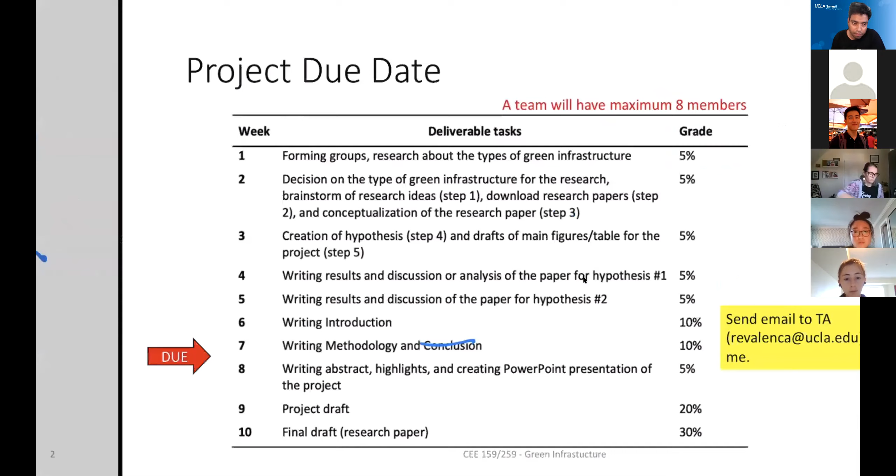That's just the Excel file—the problem will be given. You'll change different variables and you will see how that changes. So we'll solve it in class and not share the Excel file until you try it, because once I share the Excel file, you'll just change the number and get the answer. So I want you guys to try it just like we do in class.

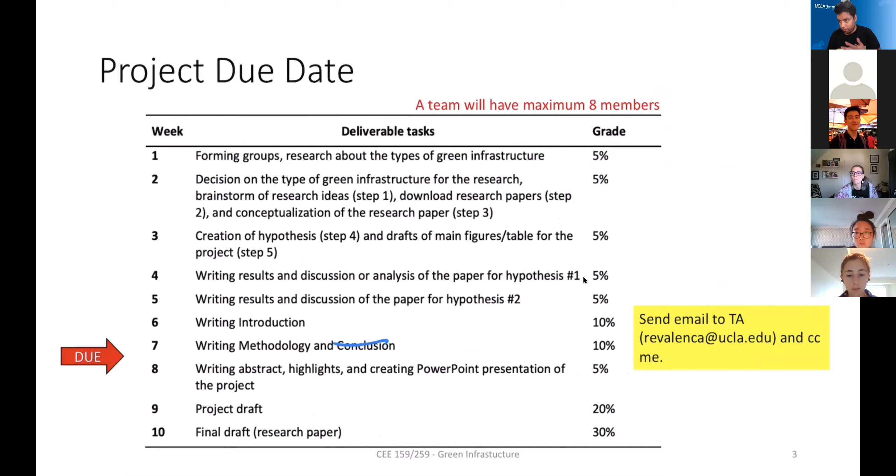Okay, so that's all for what the rest of the quarter will look like.

Mostly we'll learn different types of green infrastructure and how they're designed, but it's mostly project-based. Today we're going to learn about green roofs. Last class, we learned about permeable pavements. The idea of permeable pavements is that it doesn't require any more space than you already planned, because you always have pavements. Green roof is the same case. You will always have a roof, and if you have a roof, that means you have space. So you're going to use existing infrastructure to design green infrastructure.

But the challenge is, why not have green roofs everywhere? Every building has a roof, so why not make it green? Well, there are some constraints, and that's what you'll learn in this class. First, not every roof can be translated to a green roof, because a green roof means extra weight, and the structure has to support that extra weight. That's the first constraint. The second constraint is cost, because it's not cheap.

Anytime you change something, you're not really using it more - you're just changing the roof structure. You're not creating a space for yourself to add another room or something that gives you value. So a lot of times green roof has almost no return unless you're using it for some purpose.

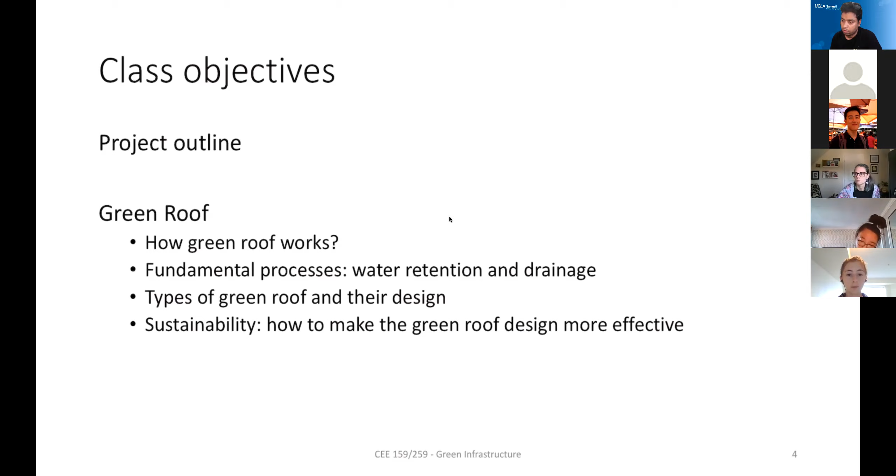Because you're not really treating stormwater using green roof, mostly in this case, in Los Angeles or a dry climate, it's mostly about energy saving. But if you're from New York, your focus isn't about energy - well, it does have some energy benefit in winter, but that's not the only reason. You can actually benefit by retaining some stormwater and lowering that peak flow, so that you won't have combined sewer overflow. So it's mostly water quality, water quantity, or energy benefit.

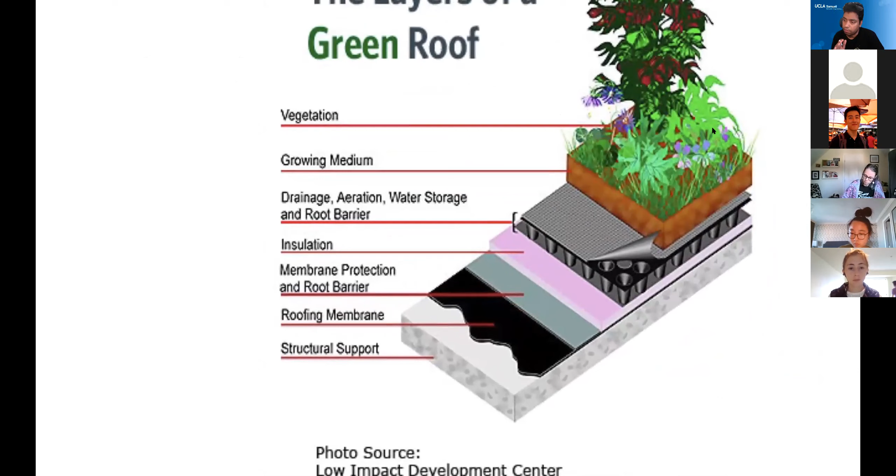So let's look at all those different aspects of it. You have different layers, so let's start thinking about what each layer does. Let's start from the bottom to the top, because that's how the green roof is designed. So you have a roof. This is the roof. This is all roof.

The first thing you want to do is add a structural support. Structural support is needed because you want to put a green roof on, but you don't want to put it directly on your roof because it will damage your roof. So you have to put some kind of in-between layer, so that not only does it hold the green roof above, but it also protects your actual roof, because once it's damaged, it's very expensive to rebuild any roof. So that's the reason for structural support. It protects the roof from physical damage. And it also gives you a basic, uniform surface for things to install on top.

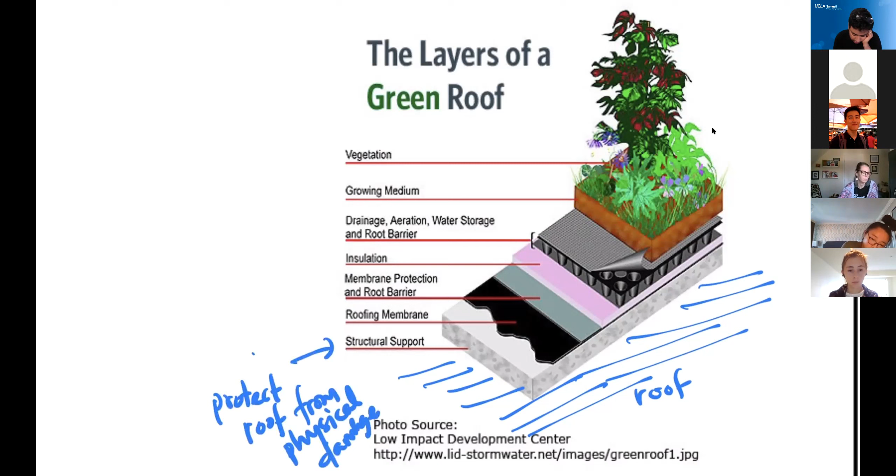Okay, so let's think of the next one. Then you have a roofing membrane. Anybody guess why the roofing membrane is there? If you don't have that one, what will happen? Could water reach the structural support?

Exactly. The structural support is something you don't want water to get into, because once the water gets in there, it will stay there, and it will damage it. Biofilm will form, the cement will crack, all those things will happen. So you don't want the water to stay there all the time, and also the roots, you don't want them to go in there. So this is mostly to prevent water from damaging the roof.

Okay. So that's for the second one. The third one, membrane protection and root barrier. So that's the next, the green one that you see over here. That already says what that means, because the black one that you see is basically a high density plastic. It's nothing else.

That's called geomembrane. That's what is used below the landfill, the same thing used below any kind of materials. That's the reason for plastic, because plastic doesn't degrade within, let's say, 25 or 30 years. Normally, this plastic will not degrade for 100 years. So that's why you put this high density polyethylene or HDPE, very high density, strong plastic there.

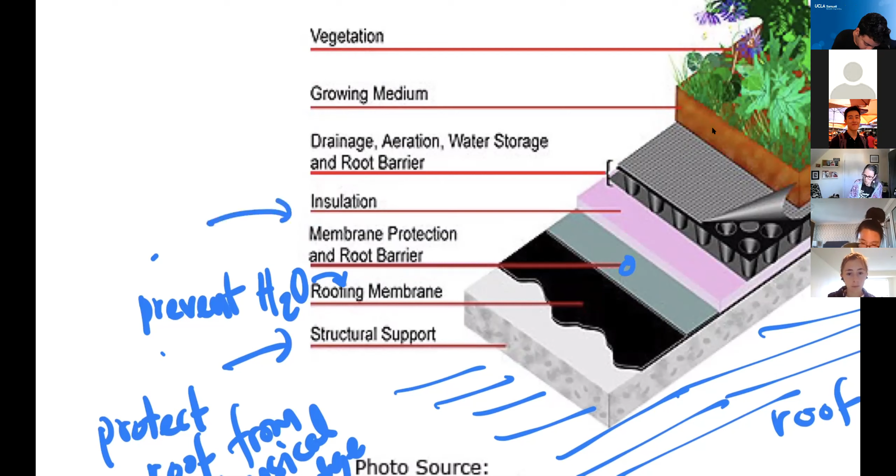Then on top of that, you have an insulation system. Insulation system is needed if you want to use green roof for energy saving. So insulation is mostly for heat. It's not for water. Water can pass through it. So this is for heat or air conditioning.

Okay. So what you are doing is putting these different types of mat. That's all you are doing so far. So the next thing is, let's see what's going on here.

Okay, there's some disconnection, so now you should be able to see my screen.

So the next step is basically a drainage system, where any water that comes in from the roof, you want to collect and drain it out. So that's why you need some kind of drainage network. And that's what it is there. The next one, what you see over here, is basically plastic grid. You just spread it, or you can apply gravel, right? That's what you do in biofilters or any other system.

But think of it this way: anything you apply here on the roof, lightweight is an important factor. You don't want heavy weight. That's the reason you are not putting gravel here. All you are putting is a plastic which has a porous structure that will just drain water. So basically, it's just for drainage, and it has to be lightweight

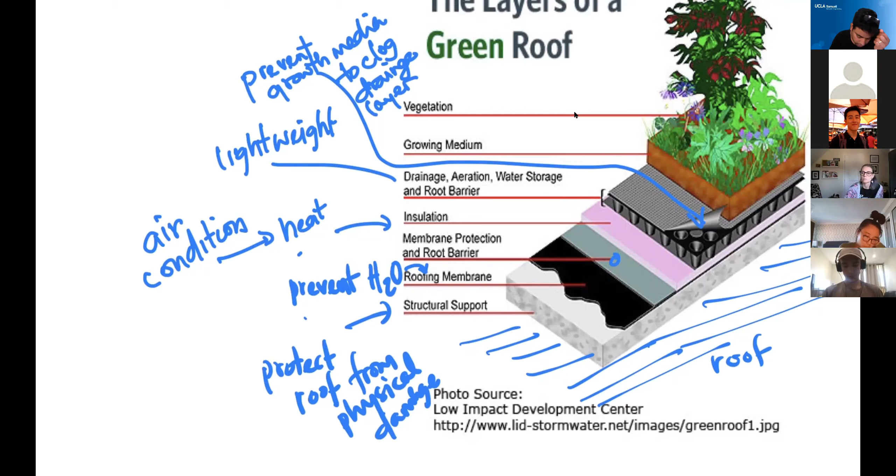And so particle size, so growth medium, the only way you can control growth medium, you will control the depth. So first is depth. So that is one thing. So you wanted to increase the depth. So let's say this is high. If you are living in Los Angeles, that's where you put the growth medium much higher. The reason is it retains so much water, or the root structure will get a lot of water from deeper soil, so that you don't have to continue to irrigate.

So depth is high if you have dry conditions, but depth is low if it is wet conditions. The reason is you don't need irrigation. You just let the water come quickly, just filter out and leave the system as quickly as possible. So irrigation is not a factor. And then second is particle size or grain size.

If you use too much sand, obviously the soil is too heavy. Number one, sand is heavier because it is not porous, and it also doesn't retain much water. So you want to add a mixture of like mulch. Think of it, you add a lot of mulch there, it will just soak a lot of water, and so that's what you want. Okay.

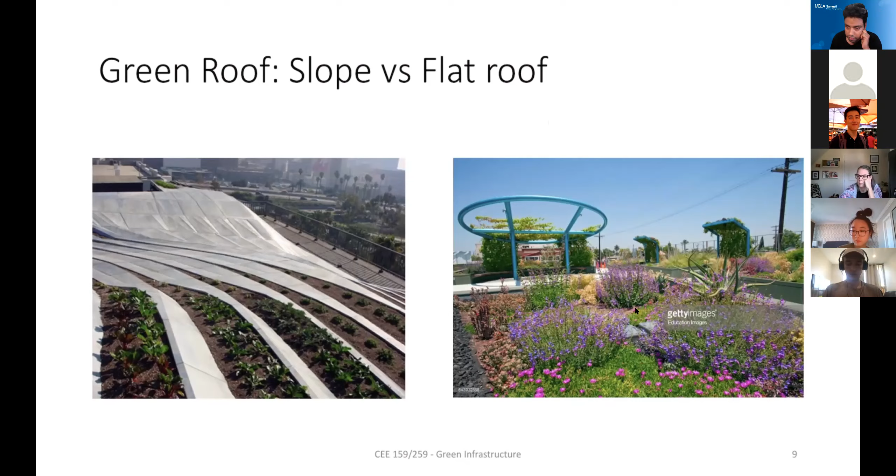When the roof is a high slope, it's very difficult to design anything there. So what you do is you create different layers. So that's what happens here. The other one is just a flat surface. And I think this is the Getty Museum. This is a Holocaust museum too on the right side. So where people are walking is actually green roof. Everything below is the museum.

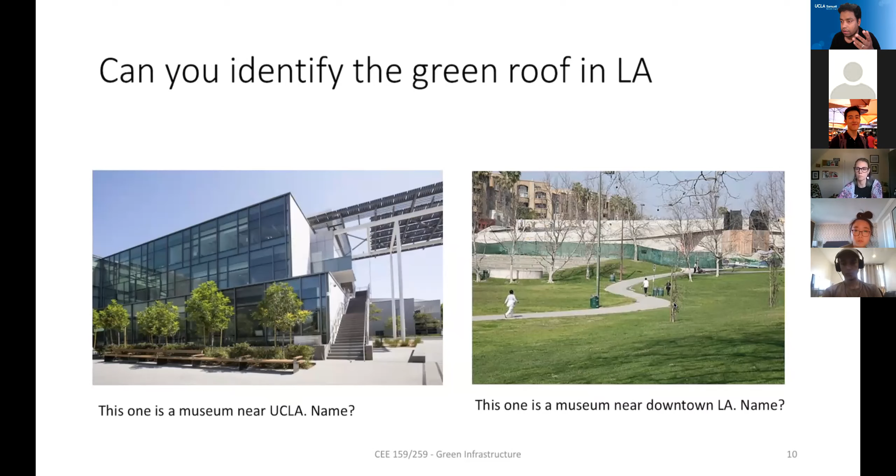And you can see at UCLA, the football stadium is basically a roof. Below it is a parking lot, right? So you can create this kind of structure anywhere. So the fundamental process, I explained it. A couple of things we just want to revisit that you already learned. This is a supplying concept here. The first is the plant health. It's a green roof, it has to look green, right?

So how to improve plant health, that's based on the moisture, nothing else. You add the compost, all that stuff, so that it has enough nutrients, so that's already there. But it's just how much water it needs, because naturally there is no groundwater here. Everything is irrigated or rainfall. So water storage is important. That's why you have this drainage system, aeration system that you can continue to use and irrigate.

Very few times people actually use a green roof for rainwater harvesting, because believe it or not, green roofs actually contaminate more water than they save. The reason is you add this growth medium which has lots of nutrients. So most of the stormwater that comes from a green roof has lots of nutrients. So if you have an area where nutrients are a problem, a green roof may not solve it. To solve it, you have to apply slow release fertilizers where the nutrients will stay there, not washed off. Okay, so that's one aspect of it.

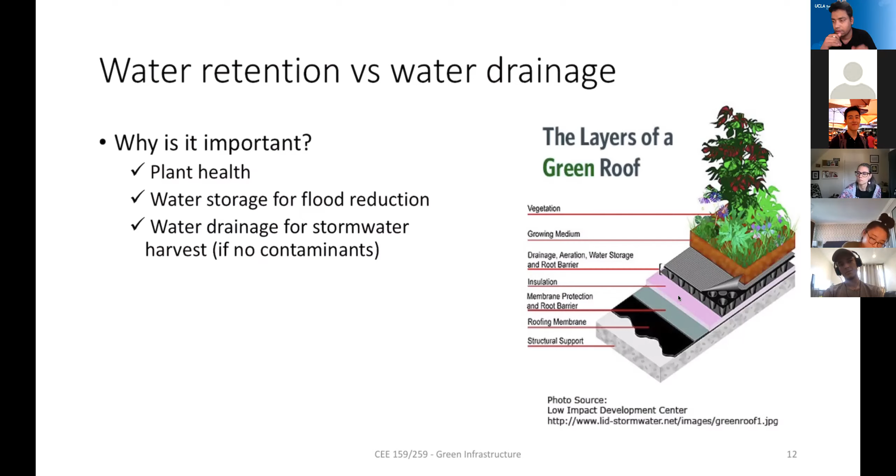And second, many green roofs have heavy metal pollution. The reason is the rooftop, all the other aspects. Sometimes there are metals on the roof. You want to protect those. You don't want to have a green roof on metallic structures. Okay, that's something to think about.

And the number one control is hydraulic conductivity. You already know how to use that using Darcy's law. The only thing I want to suggest is the K. That's the controlling factor. And what controls the K is basically your particle size. So I'm just going to write this. You know that.

So you want to drain it, but at the same time you want to also retain. So it's usually a mixture of large grain particles and, like, mulch, small particles. A combination of those in a mixture will be useful. So these are things, again, I didn't write those.

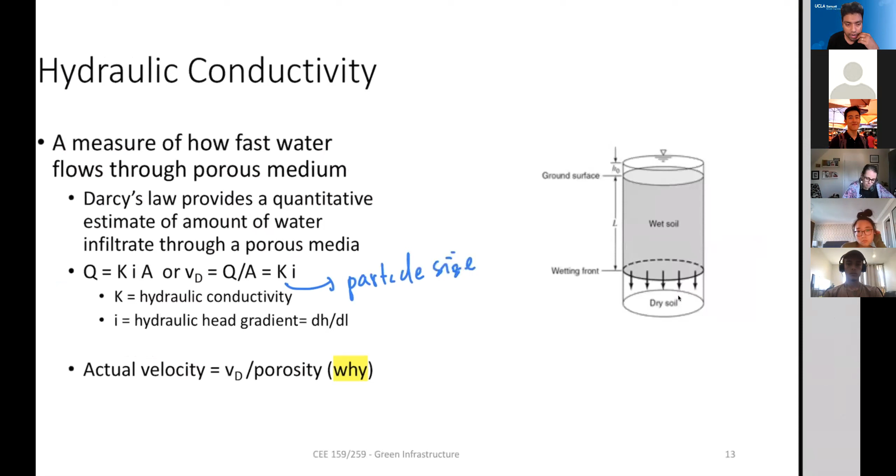Why porosity is important is basically the porous structure. That's where water moves, right? So the first thing is drainage. You've got to drain so that if there's heavy rain, it doesn't flood the entire roof. You don't want things to retain too long. And the second one is water retention.

So for water retention, if you increase the particle size, the opposite thing will happen. In hydraulic conductivity, if the particle size increases, your K increases. Hydraulic conductivity increases, but your water retention, or theta, decreases. Water content, also retention. But if your particle size decreases, your K decreases, but your theta increases. So this is, let's say, clay at the opposite end, and this is, let's say, gravel.

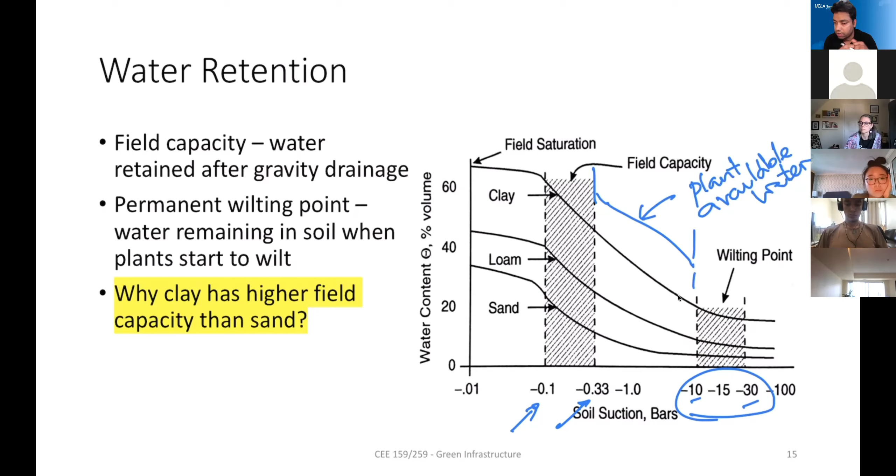Every time you create a soil media mixture, people measure for field capacity as well as wilting point. If you apply that pressure, -10 to -30, you will see how much water is drained. That will tell you whether this is a good medium or not.

What that means is if you apply compaction, the maximum amount of water that can be retained during gravity drainage is going to decrease because there is less pore space. You are compacting, there is not enough pore space to hold that water. So your soil will not retain that much water for your plant. That's why compaction is not recommended for green roofs. And why do people even compact? They don't compact by default, they accidentally compact by walking on it.

So a lot of times in green roofs you'll see there is a designated walk path where people walk, and there are spaces where the plants are. They will write there, don't step on it. Sometimes they put big rocks so that you can step on those rocks and walk to access different locations, so that you don't uniformly compact everything. So that's the design. When you walk on a green roof, this is the reason, the science behind it.

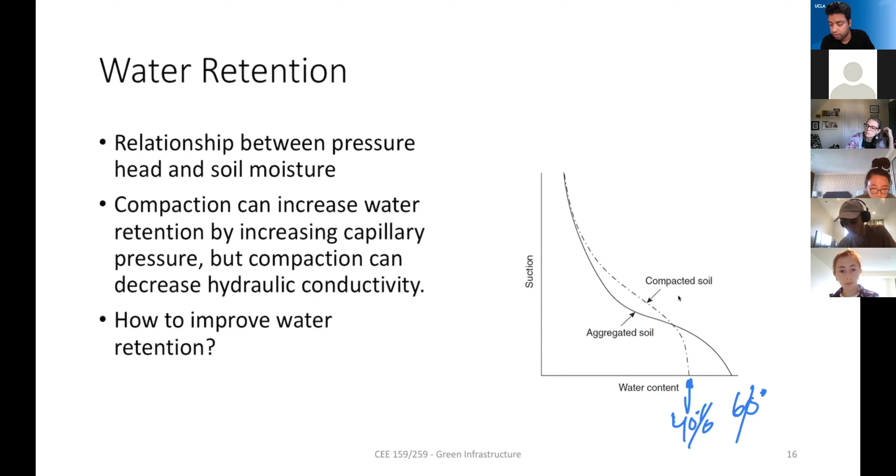Let's think conceptually. First, K. If K increases, TP increases. What is K? K is hydraulic conductivity. So if you have a high hydraulic conductivity filter media, all it means is that things drain so quickly that it is not ponding. So that makes sense. If you have a highly conducting medium, you'll not pond.

The next one is delta theta. It means how much moisture is already filled in those pores in the filter media or the green roof media. So if it rained just recently and everything is already irrigated, that means it takes less rainfall to become ponded. So that's the difference in moisture content, or how much pore space is filled with water.

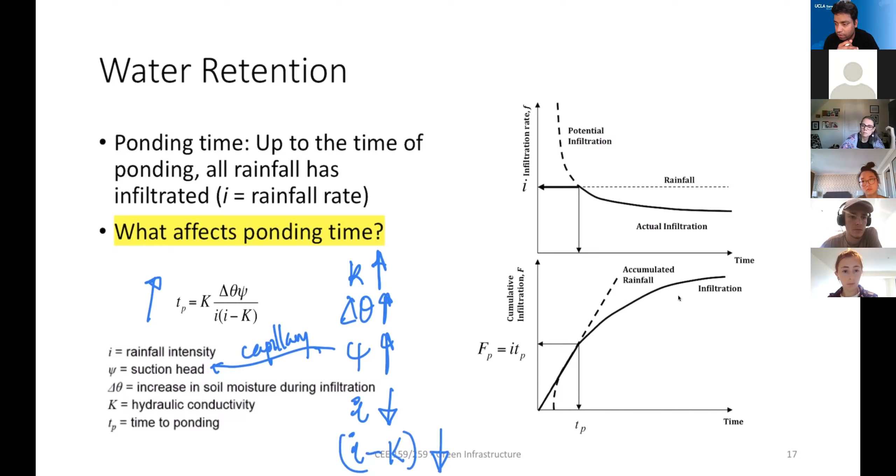So now we are going to discuss the design. I'll just give you a specific number. As I said, the components are: number one is the weight, because many structures cannot survive that extra load.

That's one of the reasons many buildings in Los Angeles will not have a green roof, partly because structurally they are not strong enough to hold a green roof.

And second, obviously, the cost of energy. You'll spend so much money here, you have to irrigate them to maintain it. It costs you to maintain them because of irrigation. The only way you can get some money back is through the money you save on energy.

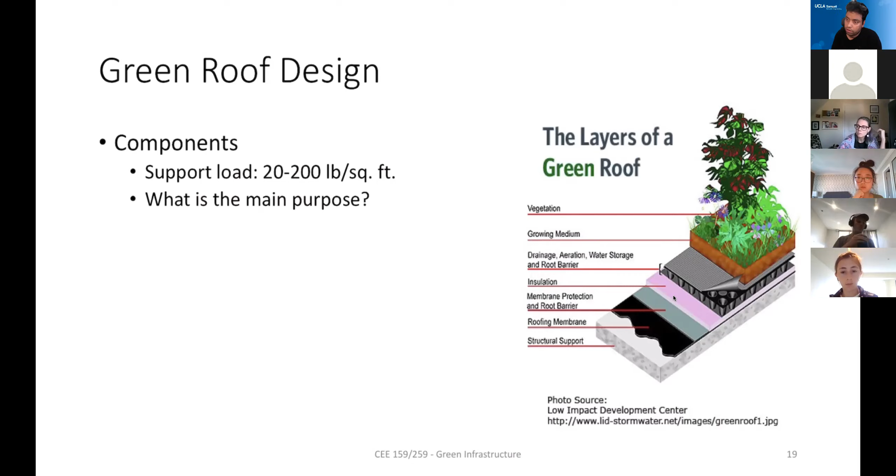There are different design permits for how it is done in Los Angeles. This is written here. All I want to say is that you have to consult with LA County to see whether you have to do an intensive or extensive roof.

Intensive versus extensive is all about the size of the filter media or the growth media. And then Los Angeles County will also tell you if the structure can support that green roof.

The fire department also checks, because if the green roof isn't properly maintained, it's a fire hazard - any kind of plant on the roof is going to catch fire. That's why the fire department comes in here. Then they do the assessment, and you'll have those teams.

So this is the difference, okay - extensive or intensive, all that. As I said, you have different types. The difference between the left based on the depth, okay.

This is for a dry place, this is for a wet climate, or dry climate. Again, the reason is the roof will have more water accessibility so that you don't have to irrigate. The second one is about drainage type.

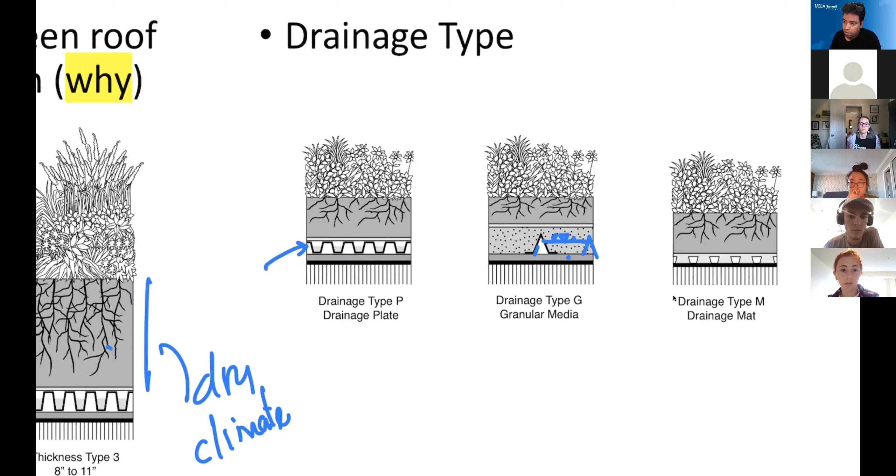If you don't have a wedge, this will just drain uniformly. So it creates this pothole-like block to keep it. There are different types of mats, different sizes - it doesn't really matter, it's based on the location and what kind of media you use. Right now, it's more common to just use a plastic tarp.

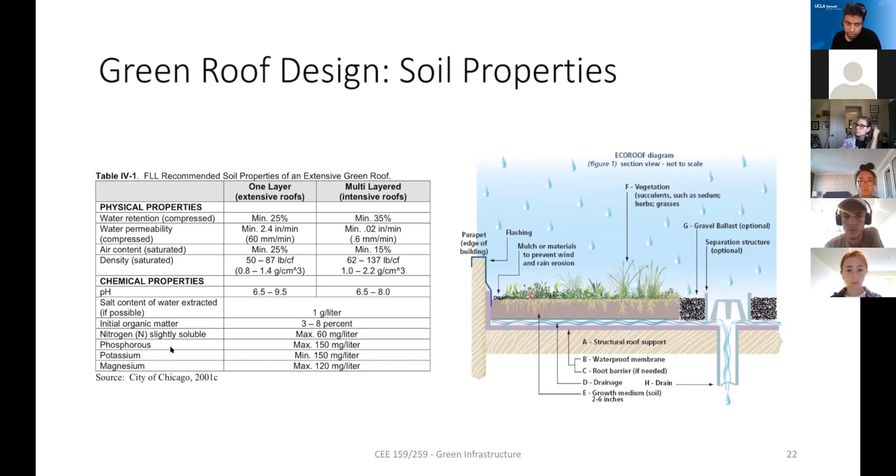And soil properties, as I said, have to retain enough water for the plants, yet be highly conducting so that it drains the water as soon as possible. So this is the other factors given - you can see there are some nutrients you have to add because you don't apply fertilizer all the time, so that's why some nutrients are added, and there are other factors as well.

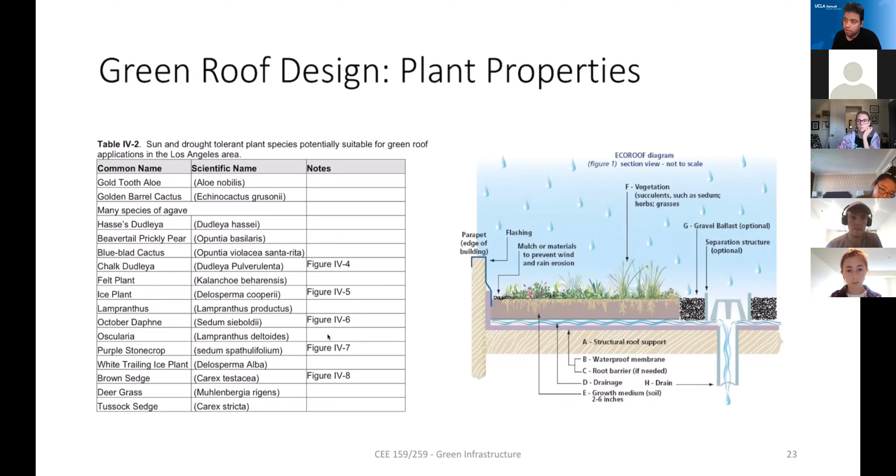Plant properties: most of the time people use whatever they want, but normally it's better to use drought tolerant plants in Los Angeles because you don't want things to be irrigated a lot. A drought tolerant plant may or may not be invasive, but since you're maintaining within one boundary zone, invasive is okay because there's very low chance for them to distribute, though who knows if their seed will go somewhere else. People mostly plant for aesthetic purposes, they don't really put native plants, but as long as it's drought tolerant, that's important.

Planting method: as I said, there are different ways you can put the vegetation, whether you put it as a small box, as you see over here, this is the media. You can see there are gravel things to collect water, or just walk above it. All those places are there so that you have pathways.

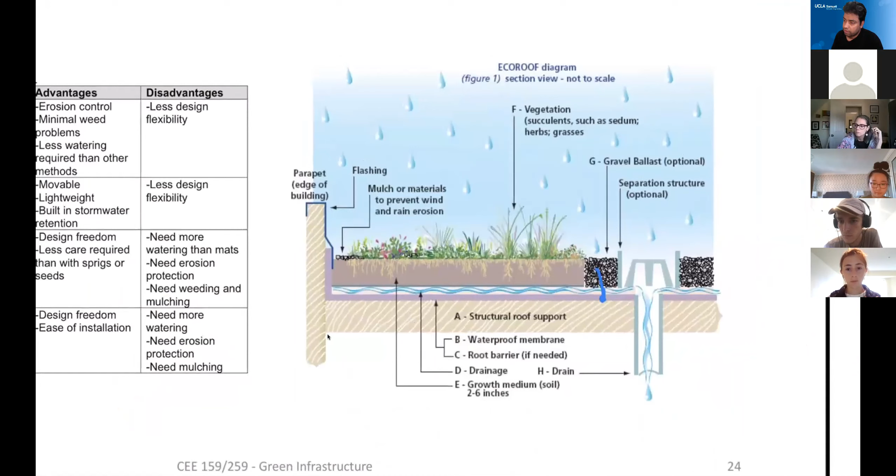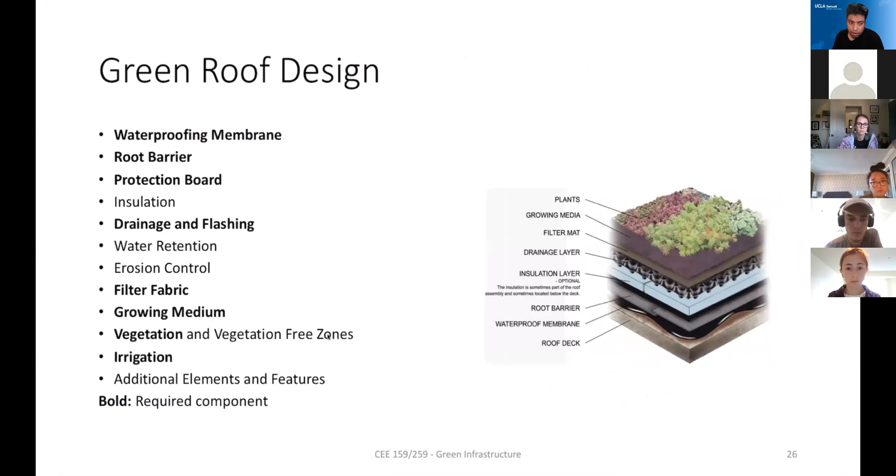Designing the green roof, I just want to show these are the different membranes. We discussed that already - what is the filter fabric? This is just written here. What material it is, it's just written here. I'll share the report so you can read all of this. I already went through it in terms of what it's made up of and what its functions are.

I'm not going to explain every detail, just know that the different waterproofing membranes, for instance, are all plastic. The only goal is to prevent water. As long as it's proven waterproof, or doesn't get destroyed by water, and is durable, that's important.

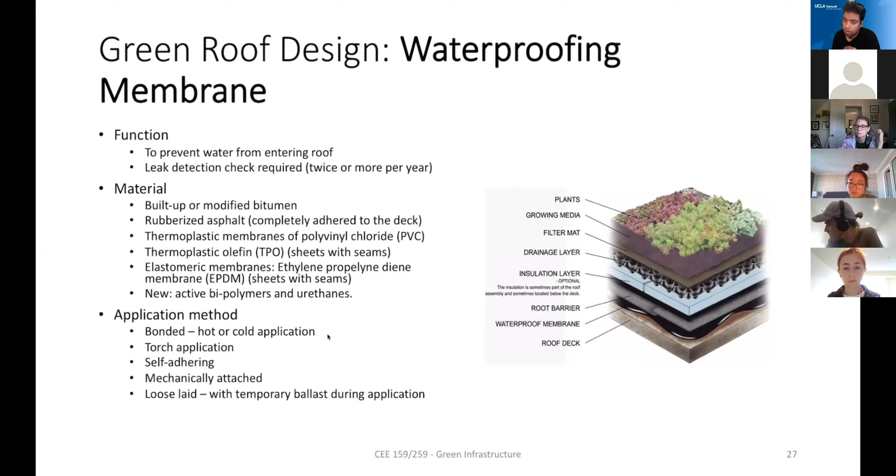There are many ways to apply it. This just shows that you can put glue and then put it on, or you can apply heat - basically put on top, the plastic will melt if you apply heat, that's how you can stick it on the roof. These are just common sense ways, I'm not expecting you to remember any of them. This is just for your project - if you are writing the project and using any of this, I'm just telling you the concept.

The root barrier, after you put the membrane, there is a root barrier. The root barrier protects the waterproofing membrane from roots as well as weathering, because when you have high heat and freeze cycles, that will also crack the membrane. So if you put this extra root barrier, it will protect that membrane. This root barrier is usually plastic, high density polyethylene. Sometimes you also add copper hydroxide nanoparticles - the reason is you don't want biofilm to grow. So if you see over here, the reason is to prevent biofilm.

It can be PVC, all these plastics. It just says the size will be maximum a quarter of an inch. You don't need too much.

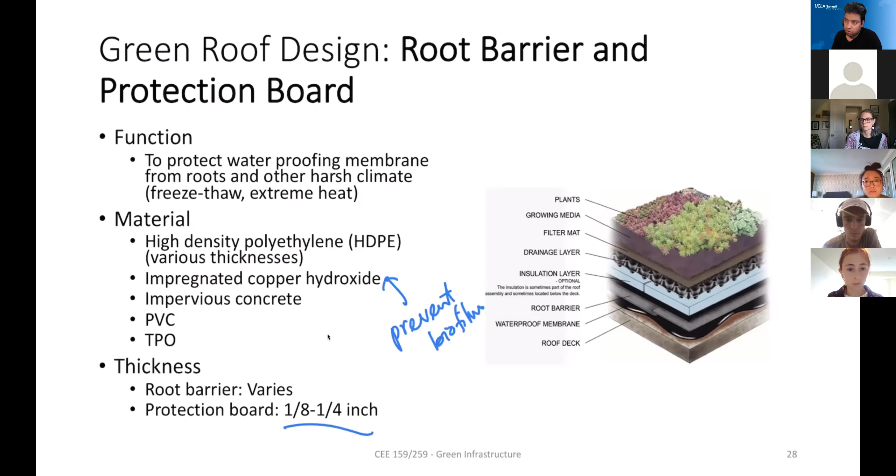The drainage, as I said, is the easiest. Insulation layer we don't go through because that's optional, a lot of times you don't need it. For instance, if you are in Newark, well you need it there too because you don't want the winter time to be too cold. So insulation layer is only for energy purposes, and sometimes you don't need it if you're not taking care of energy.

That's basically a foam, but for the drainage and flashing layer, which is the plastic layer, you see that's just a different pattern. As I said, you can add gravel or large rock as a drainage layer, but it will be so heavy, that's the reason people don't add it - they put plastics instead, but there are lighter strength materials you can add. And then it has a pipe network.

Water retention is done by the growing media, so that's where you decrease the size so it increases water retention. A lot of times you add biochar so it has porous structures. The filter mat, which we didn't discuss, is basically a mat that prevents soil from falling into that drainage layer - it's porous to let the water move, but not the soil falling into the drainage layer.

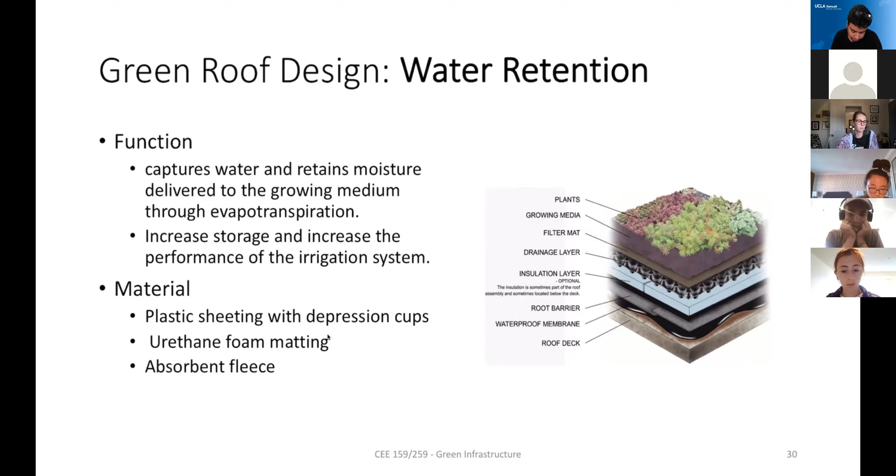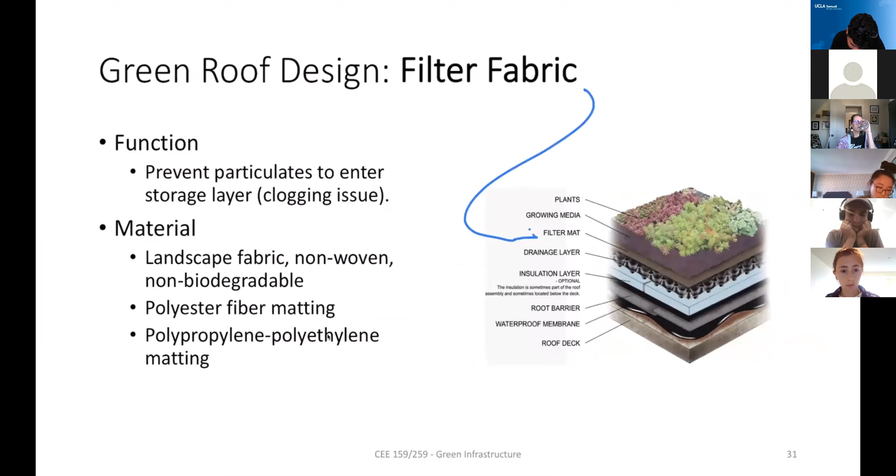Okay, that's the filter fabric, basically the same thing we discussed. Growth medium, you add nutrients, you add water.

Have you got water, please? You need 5 minutes. 5 minutes, yes, 5 minutes. All right, let me give him water. Sorry about that, I'll pause.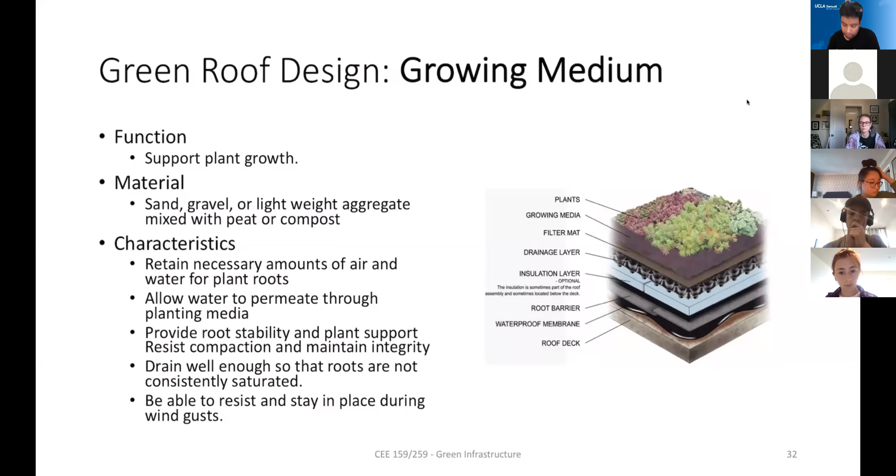Okay, so growing medium is again, as you see, the primary condition. It has to retain water and have enough hydraulic conductivity so that it drains it as quickly as possible when it's heavy rainfall. Its primary role is to protect or help the plant grow. It should have nutrients, and it should also be lightweight because that's the heaviest part of the green roof design. So that's why mulch and other things are important.

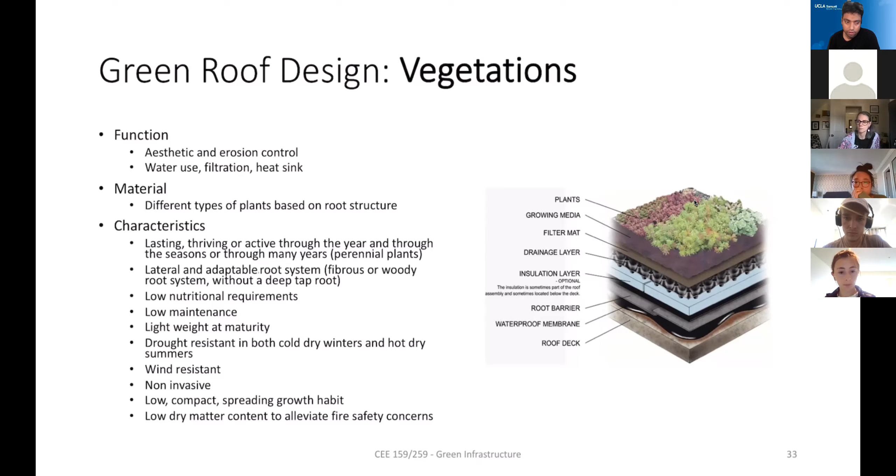Vegetation, we talk about the reason behind it, and that's why it's called green roof, not like any other roof. So those plants have to be active. It should look good. It should not be a fire hazard - if it dries so quickly, that means it becomes a fire hazard for your roof. It should also require less maintenance, meaning less irrigation. It should be lightweight - you don't want to put big trees on it. It should be drought resistant. You know California is going to experience another big drought now - we are in the middle of a drought now. So that's another thing to decide. Any kind of green, not just green roof, any stormwater treatment system, plant is a big part of it because of these drought conditions here. It should be wind resistant, non-invasive, all that - that's common sense.

So the last few minutes, I just want to show what we've done. Then we can take a break. So this is what you see.

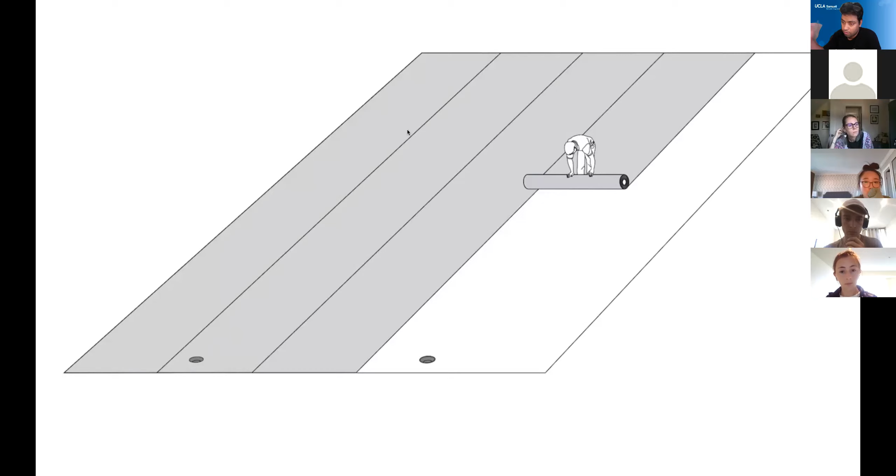First, put the membrane on the rooftop. You spread it, and once you spread it, this could be the waterproof membrane. Below that you have an insulation layer or something to level it in the right space. So this waterproof membrane, once you put this mat, you want to connect them together so that there is no leak in between. So you apply heat and that edge or glue or any surface so that edge is kind of sealed.

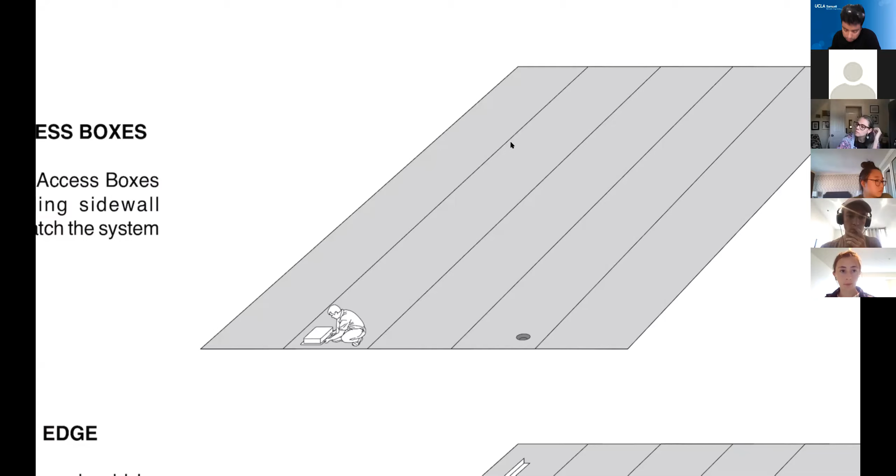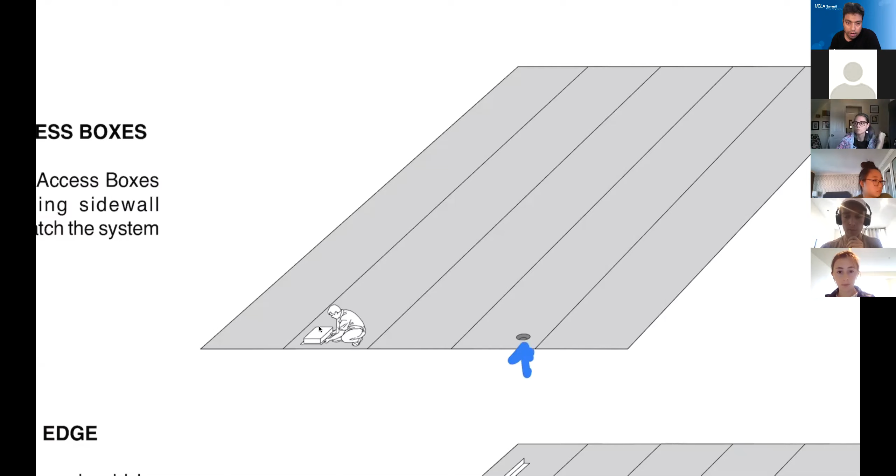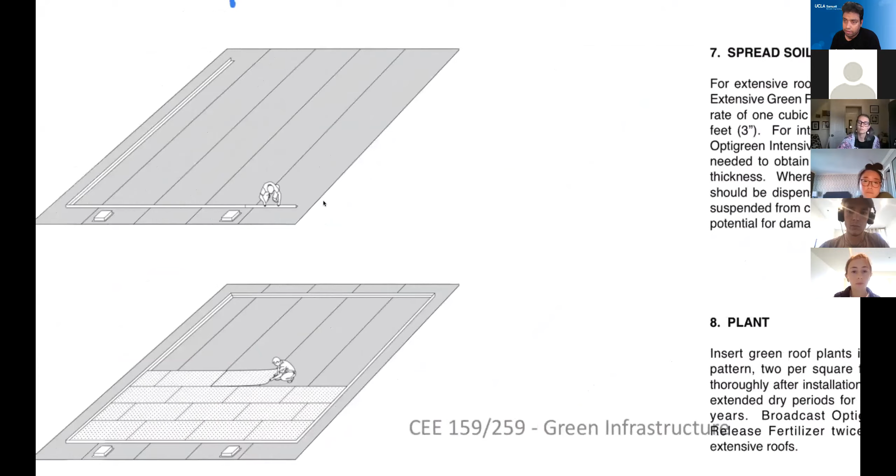And then you make these holes. These holes are basically for accessing, because you are going to drain water out from the roof to somewhere, right? So that's the drainage there, and then all the other collection system. Then you put this bar - it gives you the border so that the soil doesn't slide or move across. So these are the things you fix on top of the roof, and then you basically apply another membrane, just another layer of materials - that root protection membrane. That's the basic process, and then you can apply soil.

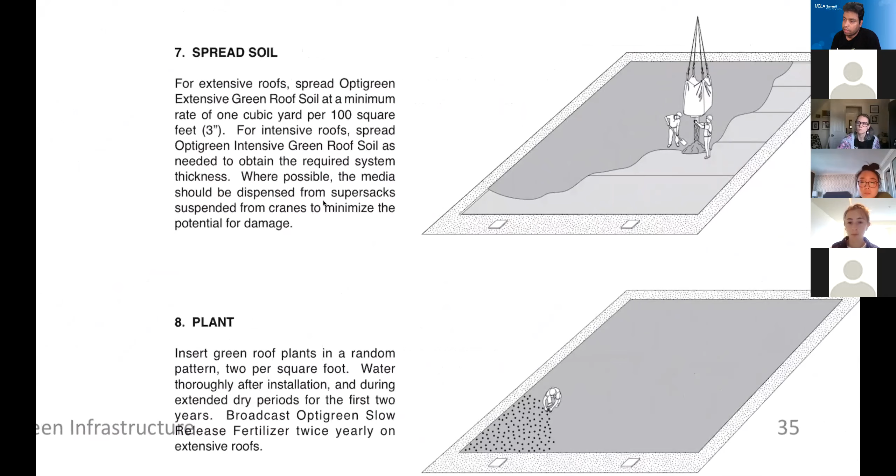In this case you don't have a drainage layer, but in other cases you can put a plastic mat first before you apply the drainage layer. Then you apply the soil everywhere, and then you put plant seed, and that's how you grow it. It's very simple - this one is not really complicated. The disadvantage of this particular one is that it doesn't have a good drainage network, so you're relying on... you don't need that drainage. That means this is something probably you want, to hold on to that water, like in Los Angeles. You don't need that excess drainage quickly.

But then there is another kind of system - it's a triangular drainage where you put this pipe, PVC pipe. That's the difference. Once you put that mat and the PVC pipe, you make holes so it collects at different locations. It's advantageous because it's basically creating a channel at different locations, and in between your soil is kind of retained. There's no advantage or disadvantage really, it's the same thing, as you can see.

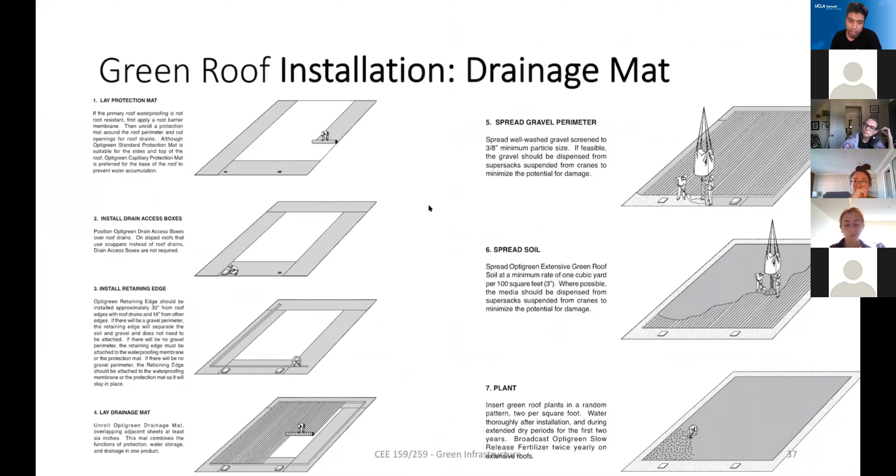Then there is a drainage mat, which is very common - it's the plastic one you see in the actual design where the plastic has a lot of gaps. So that's the drainage mat over here. Then you pour everything else.

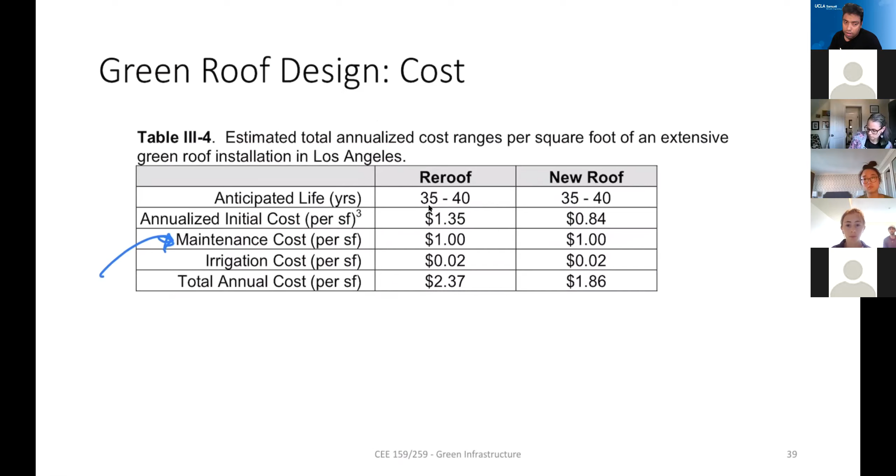So the last one is the cost. This is something you might use for your design - this is the cost for initial setup, if you have to re-roof or build a new roof, that's based on different costs. If you have to re-roof it, you have to put some extra coatings on the roof before you put the green roof, that's why it's a little bit more expensive. But the one thing I want you guys to see is the maintenance cost. Maintenance cost is the most expensive part of a green roof because that's something you'll invest every year. Design cost is $1.35, but if you think of maintenance, you're spending almost $1 for maintaining that green roof per year. So it's almost like the design cost. The actual material is not that expensive - it's always the design that's expensive. So these are the breakdowns you might use for your project.

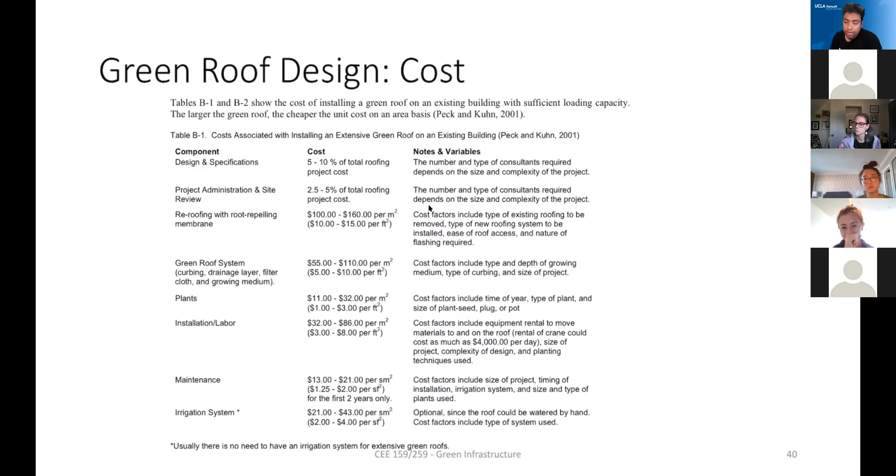So let's see - stop sharing, and generate quiz. Okay, so the first question is: which one of the layers is not required in a green roof? It's not mandatory - everything else is mandatory. There is only one layer which you may not need in every place, but everything else is definitely needed. So which one of them?

Filter mat is basically the one below the growth medium. Roof membrane is what protects the roof. Drainage layer is what? So the drainage layer depends. It's sometimes integrated as a soil. Like in the last few slides, I saw that it doesn't have a drainage layer. It means that it uniformly drains. That soil that you added is actually the drainage layer.

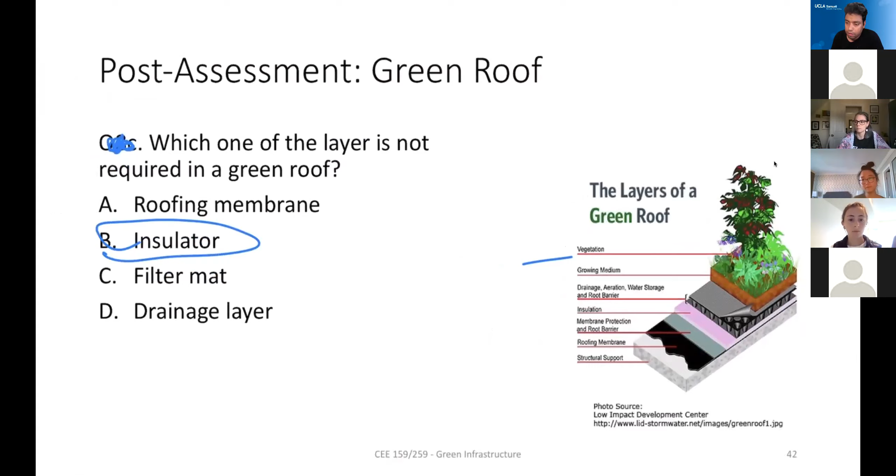And that's the reason insulation is the only one. It's nothing to do with water. It's more about the energy bill, the exchange between outside and inside. So the answer is B. Next question.

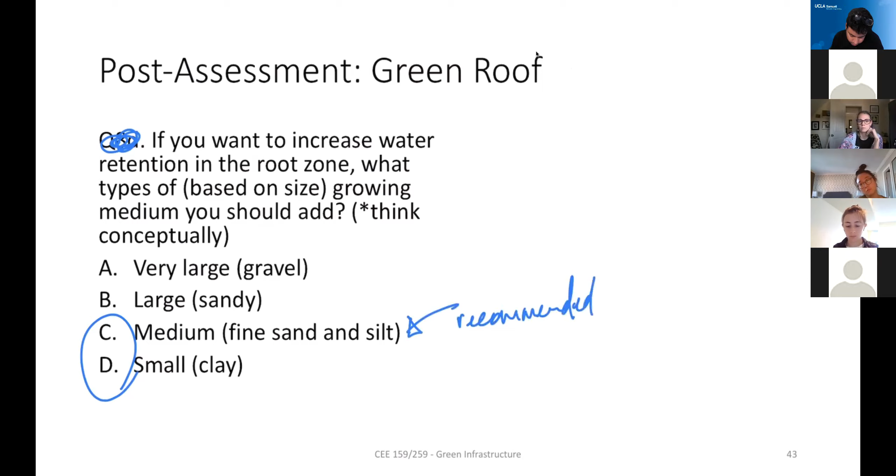It's not easy to grow on a clay soil because even if it retains, it doesn't give the plant anything, because the wilting point is so high. It holds so much water that it's not plant available. So normally the recommendation is this. Okay, so next question.

If you want to increase water drainage, what type of growth medium? So one of the other two. Drainage means you don't want to retain, and the hydraulic conductivity has to be high. So which one of them has high hydraulic conductivity? It's basically the opposite answer of what we gave last time. Okay, you have 20 more seconds to answer. Five more seconds.

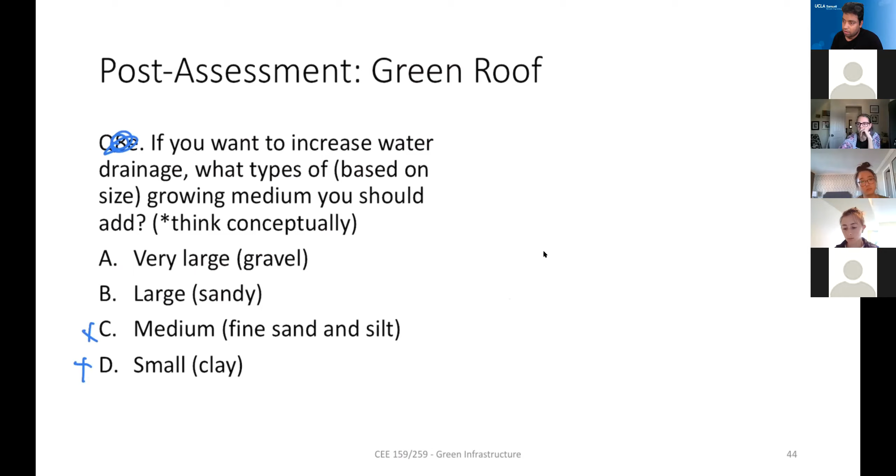Okay, all right, so let's see. These two will never be the answer because the size of the particles determines hydraulic conductivity. As the size increases, the hydraulic conductivity will increase, and that increases the drainage. So your real answer is between these two. But normally none of these are used because they are so heavy. You put some kind of light materials, but the size is higher.

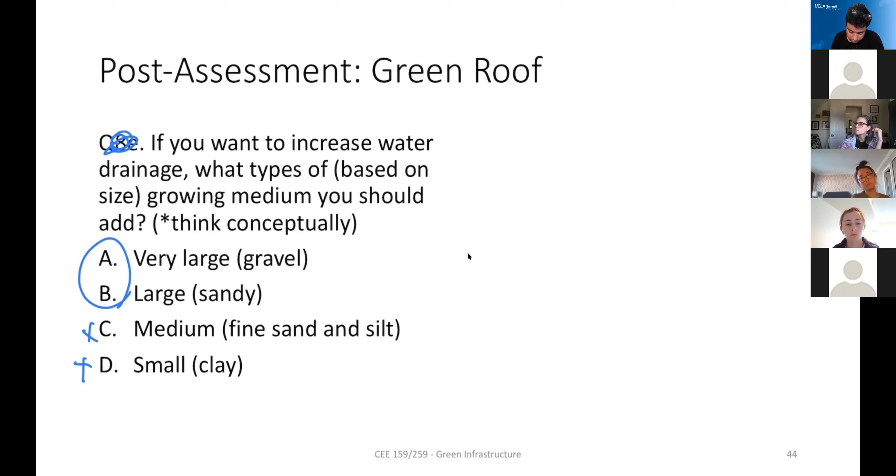All right. So that's all in terms of the green roof, and this is the sustainable part. This is something you have to think about when you design your project. That's why I wrote the questions. A couple of things you have to think about when you design your green roof as part of your project is where you get water for irrigation, because in an arid climate like Los Angeles, that's the cost.

What kind of plants to use? Because that's basically also irrigation cost. If your plants require so much water, it's not good. How do you save more energy using a green roof? So that's something you have to think of.

Adding solar panels on top of that: to maintain solar panels, you have to add more water, because the dust deposited on solar panels decreases efficiency tremendously. So for most solar panels, every week or every few days you have to add lots of water to clean the dust.

So that water can go to the green roof directly. That way you don't have to irrigate them again, and that's used for green roof maintenance. And not only that, solar panel efficiency also decreases if it is very hot. So if you are putting a solar panel on a roof directly, it's so hot that the energy conversion is very low. It's like if your laptop is hot, it doesn't function well.

So by adding a green roof, it locally lowers the temperature a few degrees Celsius or Fahrenheit. So that means it improves the solar panel efficiency. And you use water for others, so that's why it always helps. And then last is what kind of materials you can use. Usually you look for lighter materials or lightweight materials. Okay. So these are the four ideas that I gave you.

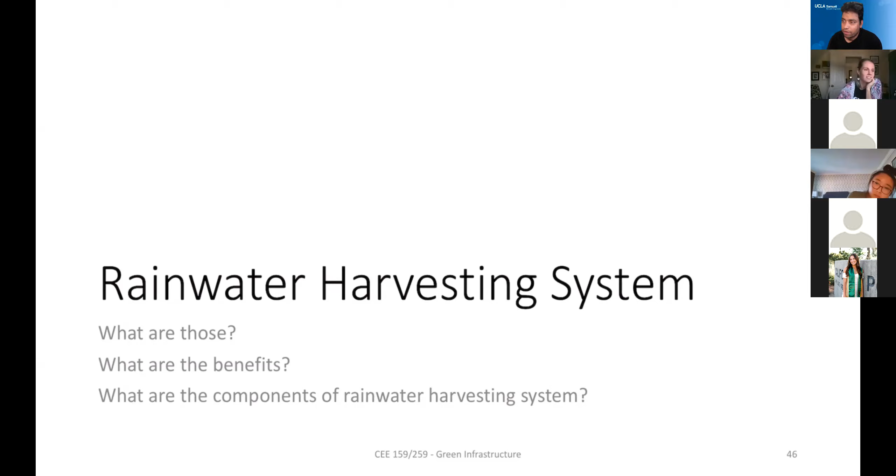I also saw that Renette says that you got two for $35 a piece. Rain barrels that normally sell for about 170. Oh, that's nice. How big are those, Renette? I don't know what the capacity is, but they're made out of old shipping containers for massive batches of pickles. Okay. So they're not the big cistern type. I can look it up. No, that's good. You can post it on the campusware so that everybody has access to it, because the chat window will not share too much. Yeah, I'll share it there too. Thanks.

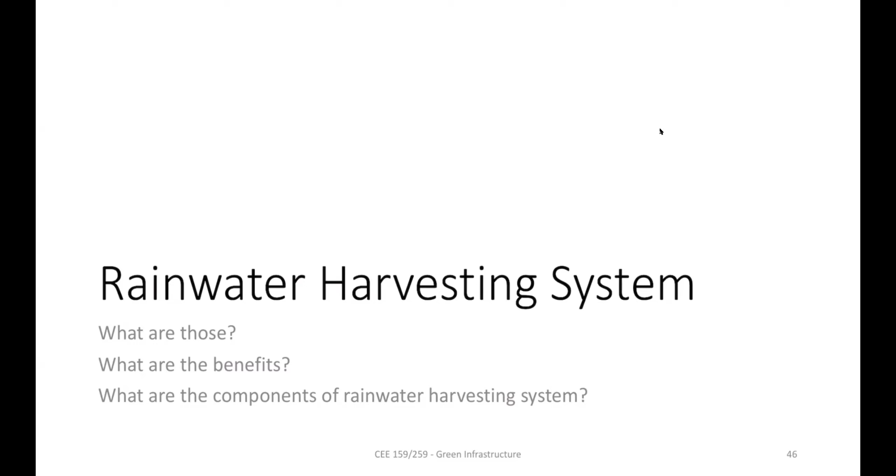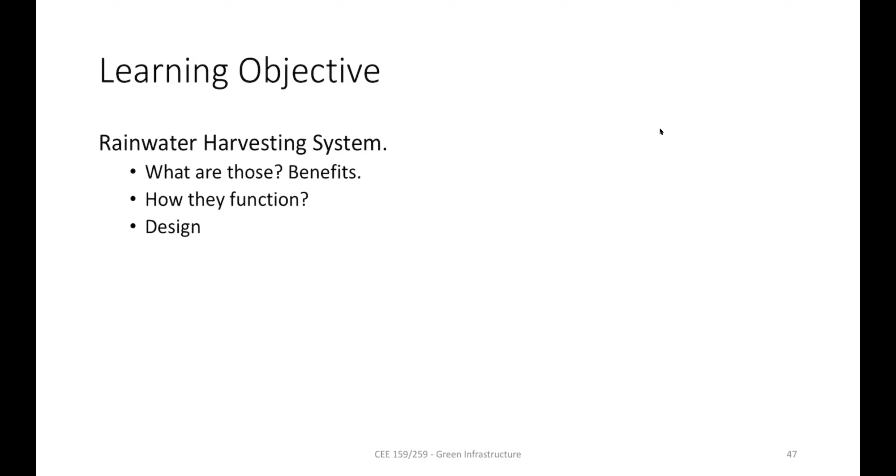Okay, so again, these are very common sense. The reason we harvest rainwater is because rainwater is the cleanest water. It doesn't have that much pollutant. Storm water is polluted because it touched the ground. So rainwater is before it touches the ground, and we want to capture that. That's the reason it's very easy: you have the roof, collect the water from the roof. That's the way to go.

And the reason we want to capture it is because if you see the percentage of water on earth, the fresh water is so low, and much of that water is wasted. The moment it becomes storm water, the expense to treat it goes up. So that's why you just capture the roof water. It doesn't have that much pollutant yet. Any pollutant from the rooftop is because your roof is unclean. So as long as you maintain a clean roof, you have better quality water to use. That's why it's very efficient to use a rainwater harvesting system.

For some reason, the screen is frozen, so I'm going to try again.

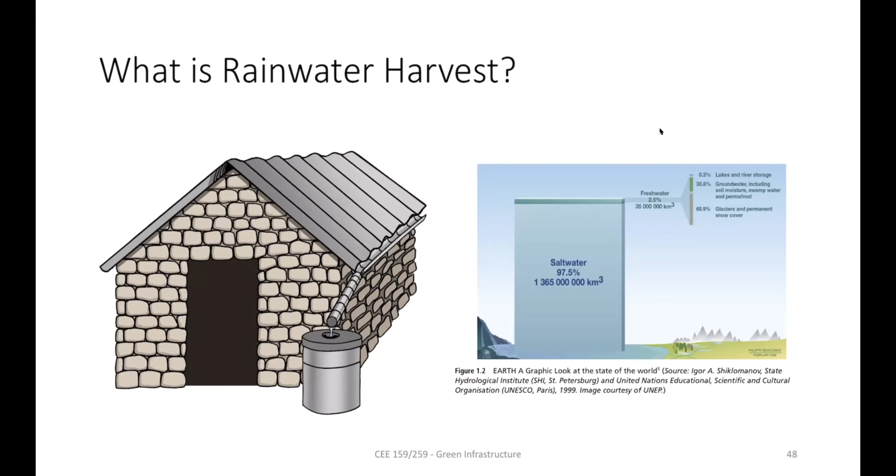Let me see again, because anything I was doing, I was not seeing the screen moving.

Okay, so I already explained rainwater has the advantage of less pollutant, and it's very easy to install because every household already has the gutter system where the water from the roof will drain onto the ground. All you have to do is just capture it and reroute it into a barrel. So how it works, you can click on the link and see how they look. I showed you before the recording in the handouts.

So the benefit is it reduces runoff because it's basically a storage device. It doesn't have any treatment. It reduces the water bill because you can use that water for irrigation of your lawn, so you don't have to use the traditional water supply. And you can use the rain barrel a lot of times to irrigate the rain garden. So the idea here is that you capture the roof water and then slowly release it into the lawn as well as your rain garden, so that you don't have to maintain them with normal clean water.

And then also, it used to be like this, I don't know whether this is still valid or not, it has $75 rebates on your rain barrel. So maybe that's the one Vinay just said.

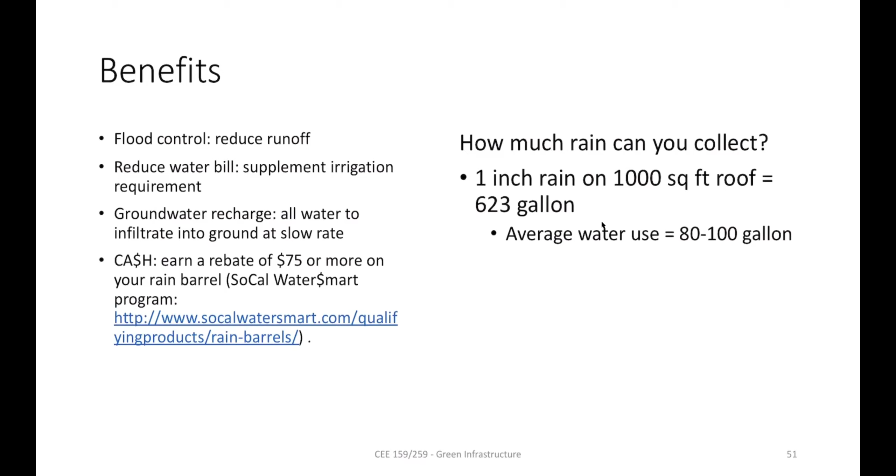How much rain can you collect? 1 inch of rain on 1,000 square feet of roof will equate to 623 gallons. Why is it important? Because normally on average we use 80 to 100 gallons. So if you have a 6 person family and you get 1 inch of rainfall that day, you get enough water for the entire day. Okay, so that's your footprint. But normally you don't depend on rainwater. You are basically using it for irrigation or washing your car or other purposes.

How to install in LA? This is a YouTube video where somebody was installing. You can see that. So it's the same thing. You put some kind of container or some kind of balanced surface, then put the barrel, and then basically you direct the gutter inside it.

Okay, there are different ways to design this pipe so that it doesn't overflow. So basically you have a system with a pipe here, so that if the water goes above it, it will start draining. So you don't want things to overflow; before that, it will start draining outside. So those designs are there.

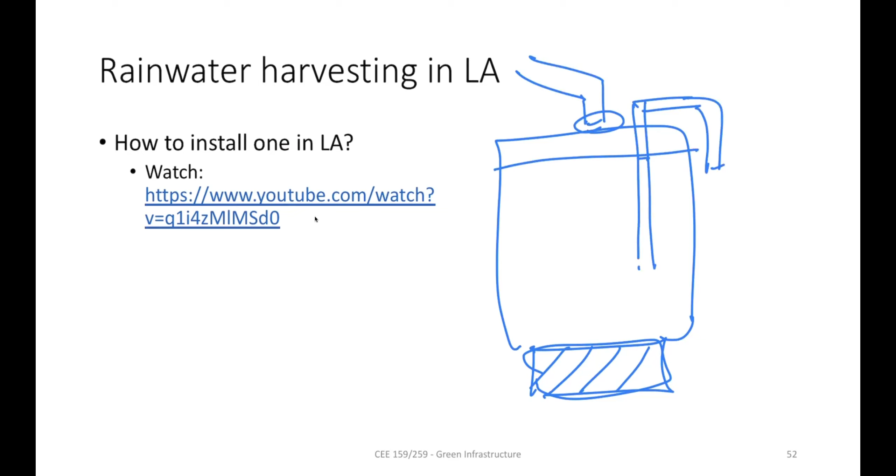Decision making is basically, I would say that almost every place you can use rainwater harvesting systems. But normally, the reason people don't use it is if you do not collect enough water for anything, you are just keeping it, not using it. So in Los Angeles, even though they're giving them for free, it doesn't rain much. If it doesn't rain much, you are not using it, so it's just sitting there doing nothing. It has to rain to have rain capture. So that's basically demand and supply. Whatever you invest, you've got to get it back by using that water some way. So you've got to have enough demand.

So any places where it rains a lot, you don't need a rain barrel because you naturally get rain all the time. On the other side, if it's too dry, you don't need it. In between, you need it.

And some places like Colorado, every rain that comes to your property, you don't have the right to it. So that's another water right you have to think about, because the water that you receive in Colorado is owned by people in Arizona or California because they depend on it. So that's how complex water right systems are. So in some places the policy itself will not allow you to have a rain barrel.

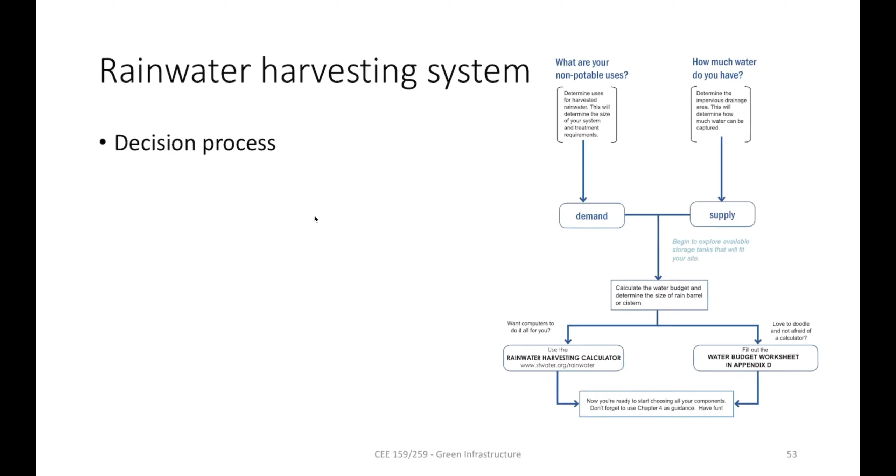The process is a simple thing. You filter all the leaves and large particles out, and any kind of pollutants you may be able to remove by putting in an activated carbon tank system. But that's if you are going to use that water for drinking, and then you have disinfection. But 90% of rain barrel treatment is mostly debris removal, like removing large leaves and other stuff. And sometimes you can also put a first flush design. I'll show you how it is done.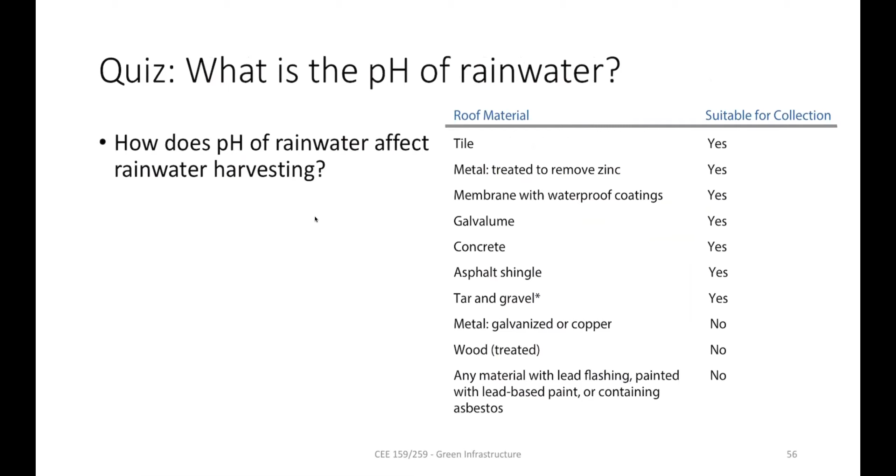But a couple of things you want to check is the pH of rainwater. In some places, if you have acid rain, the low pH can dissolve some of the metals from your roof. So you don't want to have a rainwater collecting system if your rooftop is made of metals, because that will release a lot of these pollutants. So design, again, these are all in the handout.

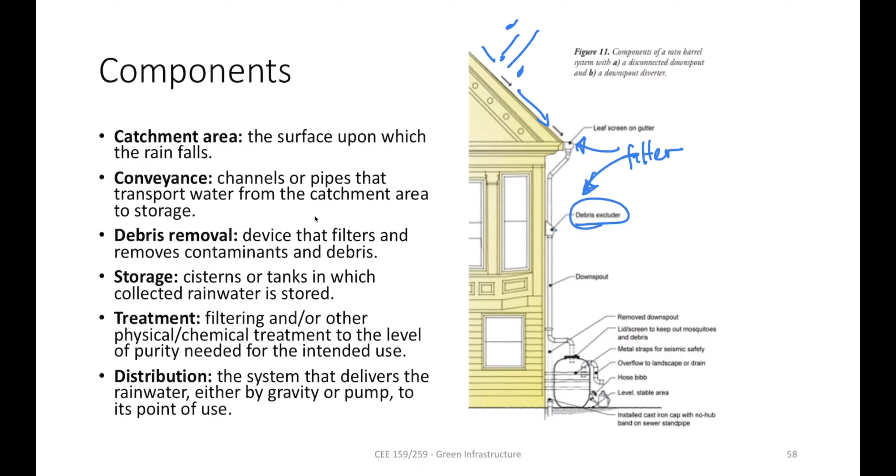The one extra is this one. This is basically, I'll show you, this basically takes care of the first flush design. The idea here is that if I extend it, your pipe comes here, you collect water, but you basically create a surface where any kind of water comes in, the very first flush, whatever the first amount of water that comes from the rooftop, you retain it here. Only when it's completely filled up to here, then water will start moving.

So that means that the very first drop of water will be retained here, and it usually has more pollutants because the very first flush has a lot of dust. So you don't want to collect that. So that's how you can create a groove here, the pipe, so that that drop will go there first. Once it's completely filled, the rest of the water will drain into there. So that's the first flush design. This is called first flush removal design.

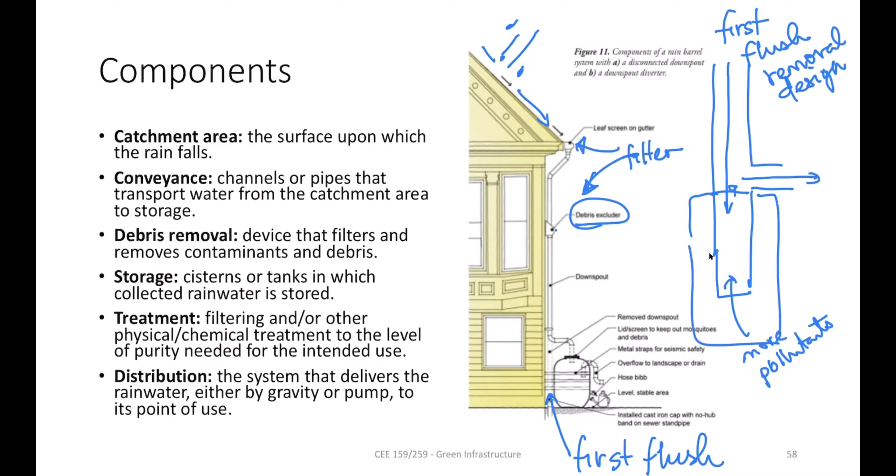So this is something very common in many places where you don't want to capture that. And the volume of whatever amount can be retained here depends basically on the size of the roof, whatever the first flush volume would be. And as I said, the quality depends on the roof design. So normally you don't want any kind of metal roof. So that's why it's clay. All these roofs are pretty good for the green roof.

Don't use roofs with untreated metals. So it has to be galvanized so that it's not releasing those pollutants. And a lot of times people apply herbicide because you don't want the plants or the weeds to grow. So if you are applying those herbicides, don't use that water. Make sure that it's all clean before you even start using it.

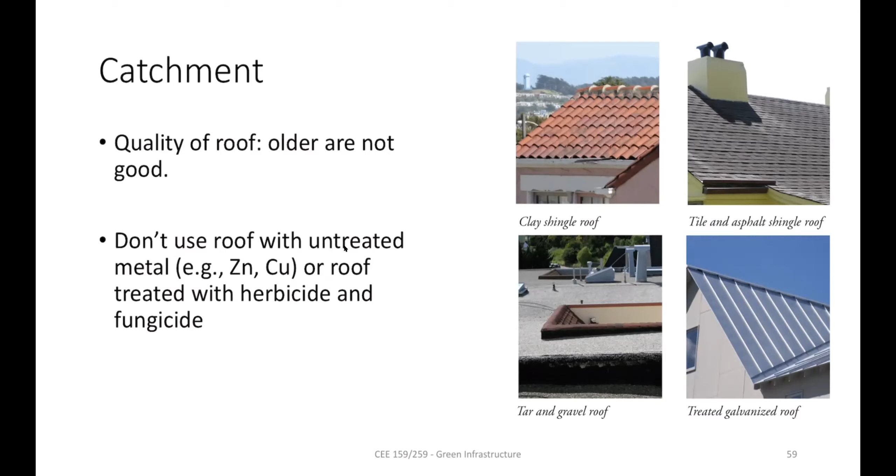Again, I talked about this joint gutter where you have this screen to remove leaves, and then at this joint here you can have another screen. Sometimes if you want to, the way to do it is basically the natural way, and you just cut it and just route that into your rain barrel.

And so this is, I already talked about the first flush removal mechanism. This example is just to show that all the initial water will drop all the way to the bottom, and you can have a valve here to open from time to time so that all the dust that accumulates, we can remove it. So this is the first flush design. That's a simple T. That's all it does.

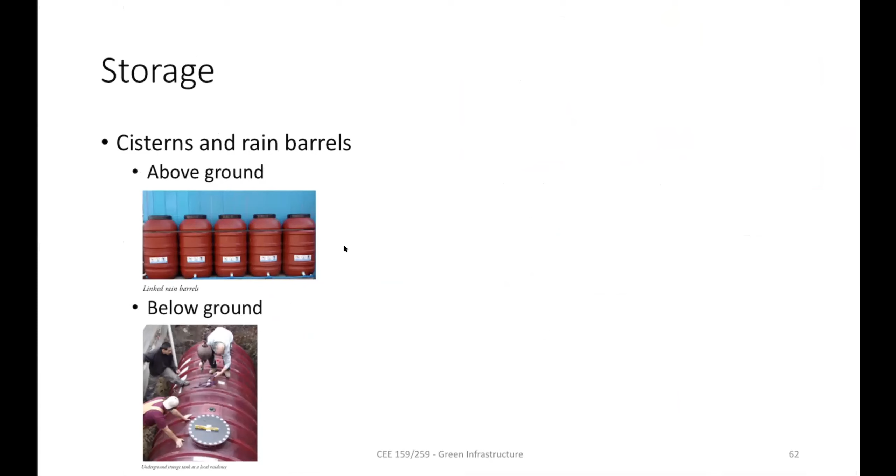And the cistern is basically big tubs, or like Renate says, a pickle jar or pickle barrel or beer barrel. So this is basically plastic material. The inside is coated with an antibacterial agent so that it doesn't grow biofilm. And sometimes you have to add a little bit of bleach so that the biofilm doesn't grow. So those are there. That's it. There is nothing else there to discuss.

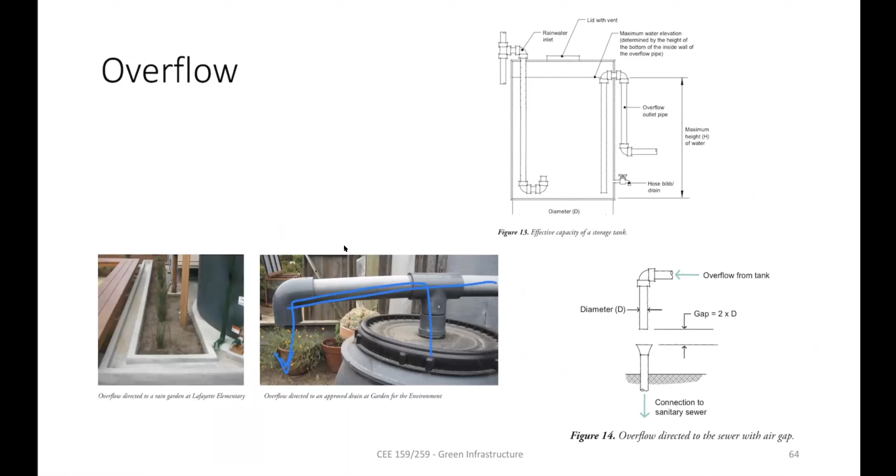So normally these are not treated. So that means you don't use it for drinking. What you do is use it for irrigation or car washing or spray irrigation. Sometimes you need to disinfect. That's why you add some bleach or you have a UV disinfector. You can just turn on that UV light in between so that it is maintained.

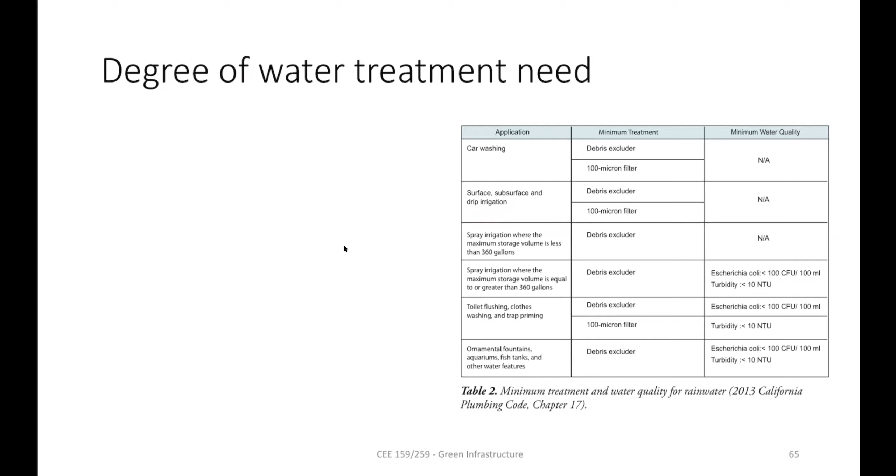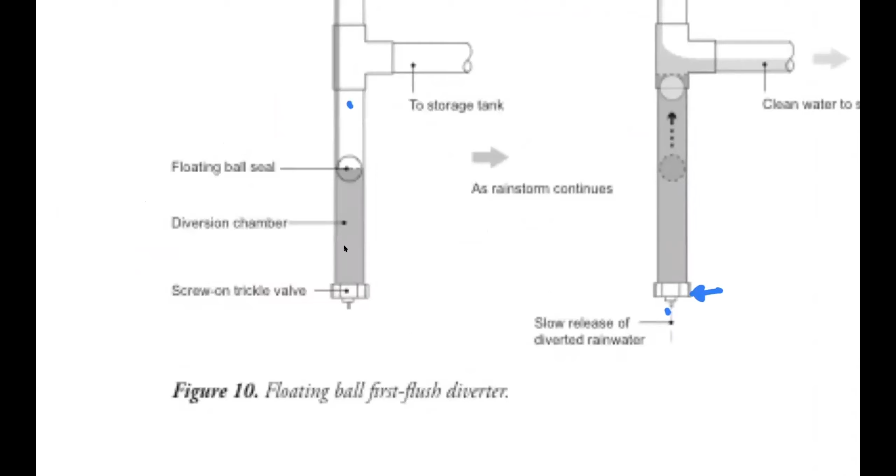So maintenance is basically cleaning so that there is no biofilm, and the first flush drain. With this one, you have to basically open this cap from time to time so that any dust accumulated will release from the system. It's a pretty simple design. There is nothing there to really discuss other than the fact that you have to have a strainer for debris. So this is the cost. Not the cost, I didn't write the cost here. The maintenance, and that's it.

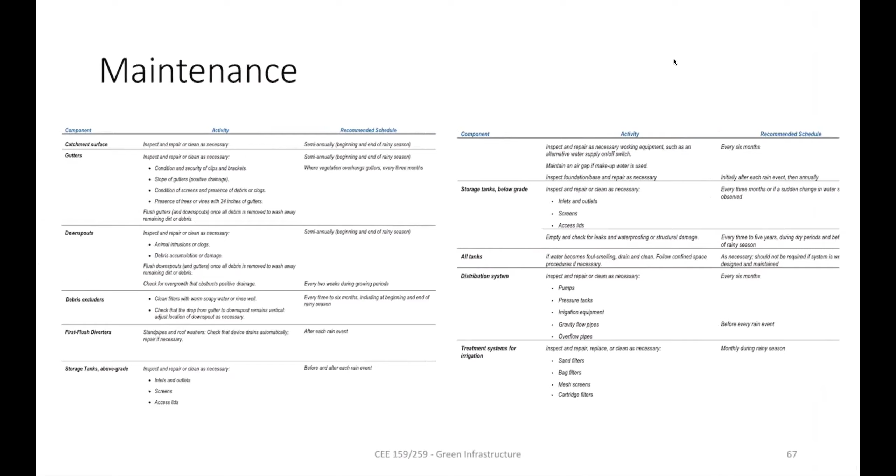Professor, yeah, I had a question. I don't know if this is something that's very realistic, but with the rapid implementation of residential solar, and how utilities are buying back some electricity from houses, is there any sort of buyback or return or benefit that the municipality would be looking for in rainwater catchment from houses, or is that, because it takes so long, something that's not really realistic at this point?

So sorry, I was distracted a little bit because somebody called without even realizing, I was trying to turn off the phone. Oh, no worries. So you basically, like you briefly said, yeah.

So basically, like houses that are producing solar and have excess energy are selling it back to utilities. Is there any sort of equivalent to use the rainwater? Because I feel like you just can't collect enough for that to be realistic, right? Yeah. So I think the challenge here is any water treatment system or water supply is not like electricity. It's energy, right? So energy is easy to move.

But moving water costs energy. So energy is the limitation. That's the whole reason why water cannot be transported very easily. It's not like we don't have enough water. I mean, New York has more water in 10 years than California would have. So why not just drain that water from New York to here? That's what we are doing, in fact, in California, Northern California water coming to Southern California.